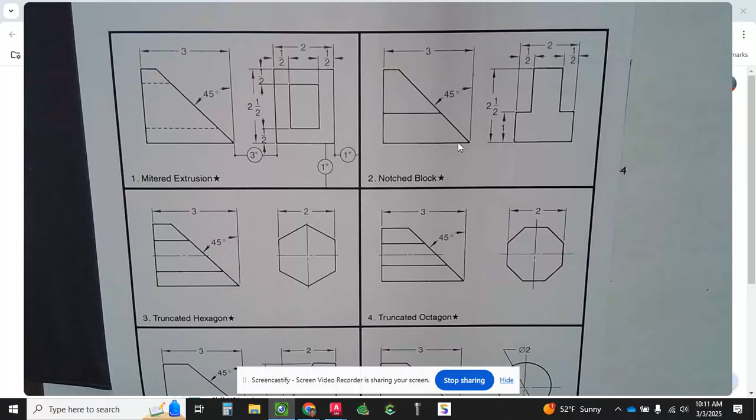This is 3 wide, 2.5 tall, and it's got a 45-degree angle back this way. So I am going to start by drawing me a line. We are not...

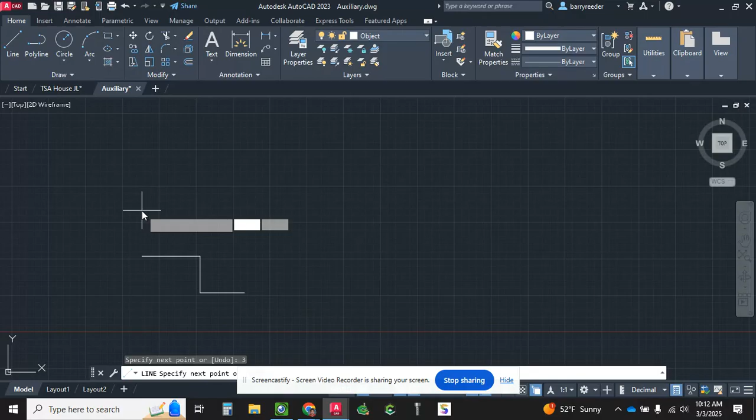I didn't have a flat drawing area, so let me start over. I'm going to go 3 inches this way, go up 2.5, and I'm going to draw me a short line over here at the top.

Then I'm going to draw a line from here in this direction. Straight up would be 90. I'm going to add 45 to that, so let's go 5 at an angle of 135. You can trim or use fillet, either one, to get that like it needs to be.

Okay, our other view is 2 inches wide, 1 tall, 1/2. 2 wide, 1 tall.

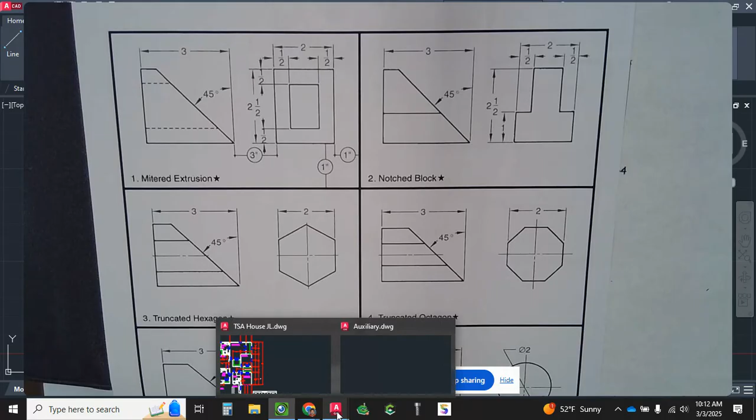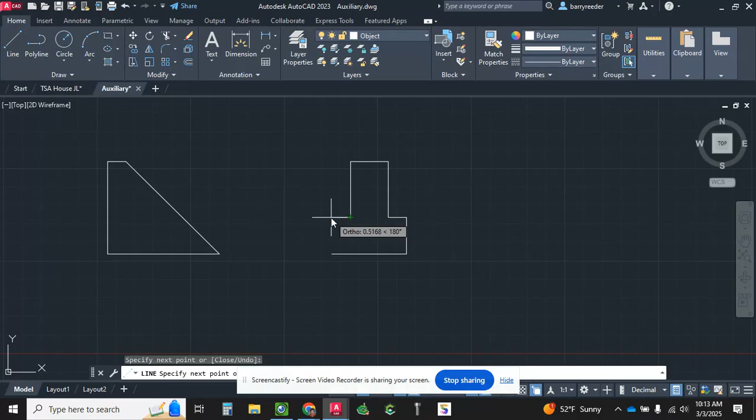So I need to be 3 inches away from that. I'm starting from there, come over 3. I'm going 2 inches wide, go up 1, go over 1/2. Go over 1, 1/2, and back to start.

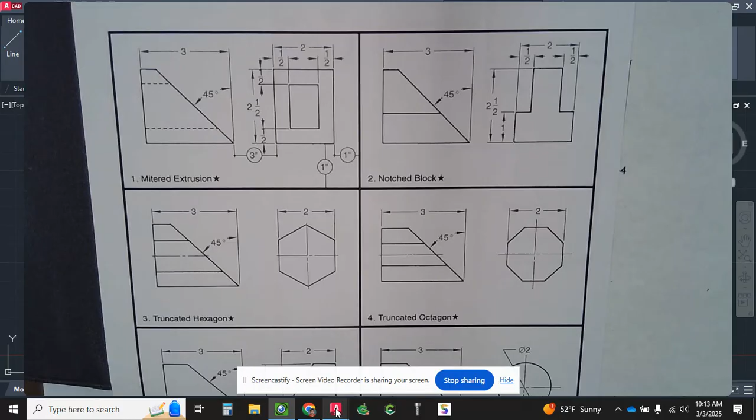So we'll have a line on this that's in line with this here. So let's go back to our drawing. Let's go ahead and put that in. So I need a line here to there.

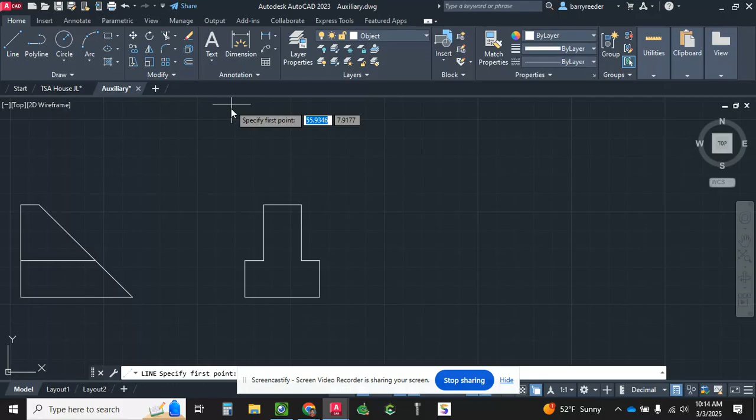Now, drawing the auxiliary view, you need a line that's perpendicular to the slanted surface. The easiest way I've found to do this is I start out here in space and come back to my line here and look for the perpendicular symbol. When I see the perpendicular symbol, click there.

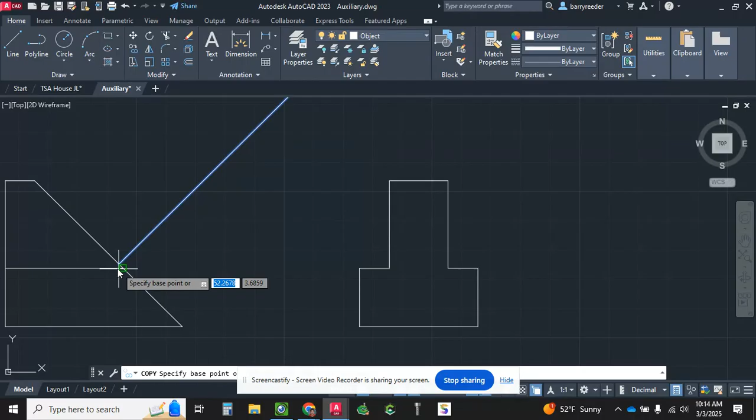Now I'm going to need that line on all of my points on this surface. So I'm going to copy that to there and to there, and then I'm going to move this one.

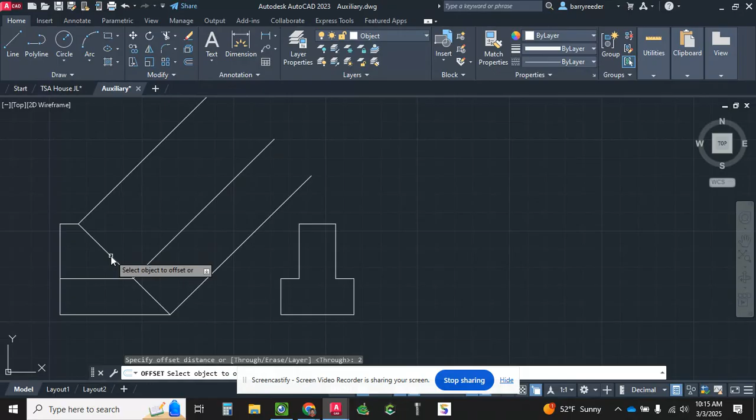All right, our width was on this, and again, this is just my way of doing it. It may not be the perfect way, but my width on this is 2. So that's what I'm going to offset by. I'm going to offset by 2, and offset again by 2, then trim around the rectangle that I just made.

The height of our auxiliary view is based off of this, so we've got everything off of the height. Now our width or depth is based off of this view, so we have 1/2 inch from each side. Again, this may not be the best way, but it's the way I've found easier to do. I'm going to offset by 0.5.

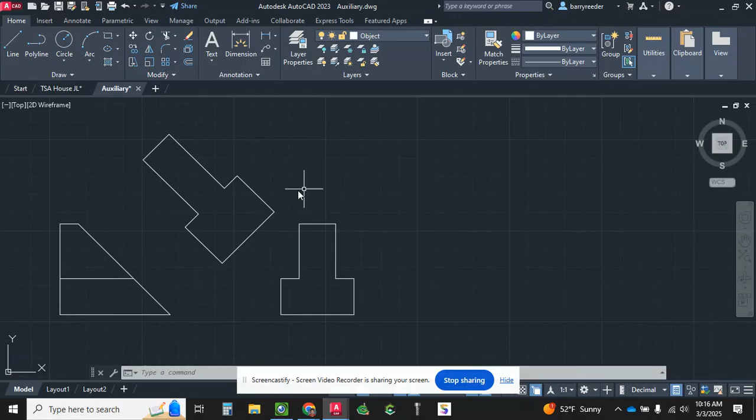Now I have all of my measurements for this view. All I've got to do is trim it up and make it look like what it would need to. Alright, y'all see kind of what I did on that. Let's go to number 4.

And if you're not keeping up, I am putting this on video so you'll be able to access it. This is the truncated octagon. This time I'm going to start with the octagon. It has a measurement of 2 across the flats.

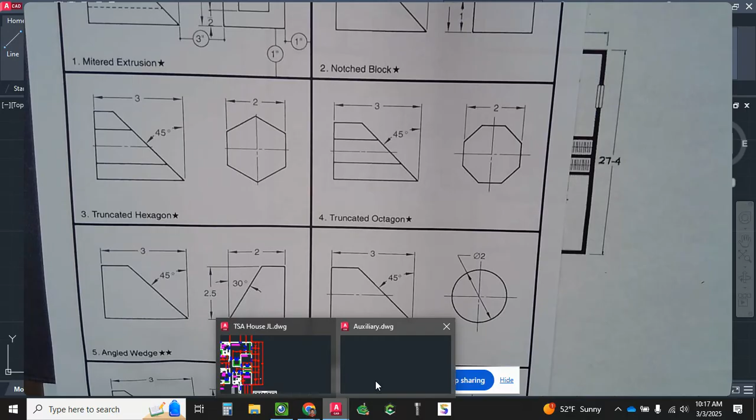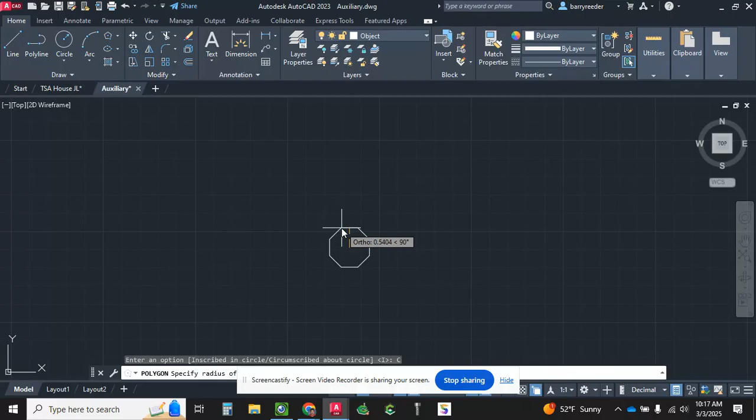So I'm going to go to polygon, 8 sides. I'm going to specify a center. This needs to be inscribed or circumscribed—it would be circumscribed. And it's asking for a radius. The diameter is 2, so the radius would be 1.

Alright, we're going to double check our work. It should be 2 inches from center to center, or midpoint to midpoint. Again, we want to be 3 inches away, so I'm going to do it like this time. I'll go over 3, and that's my starting place for the other one.

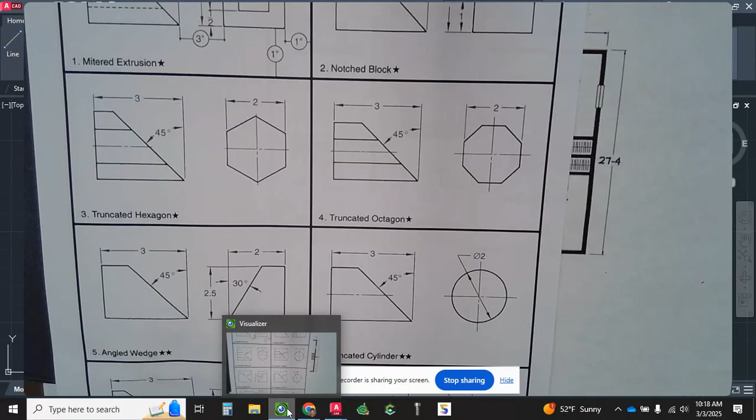Let's go back and look at it. I don't even remember what... oh, it's again 3 inches with a 45 degree on it. So...

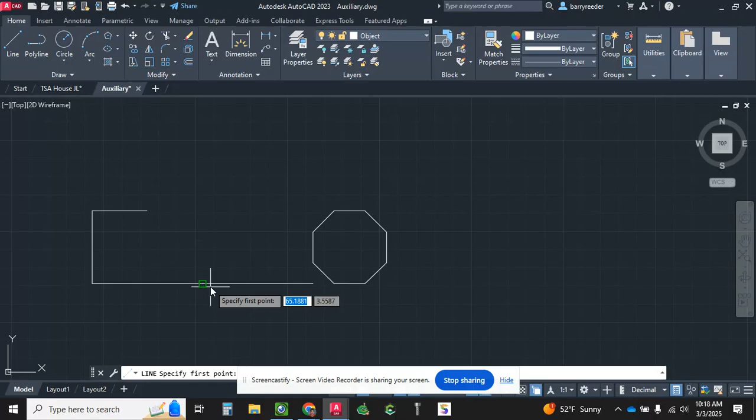Let's go 3 inches from there. We're going to go up 2. We're going to draw a little line over that way, and then start back at our starting point here. We're going to go 5 again at an angle of 135.

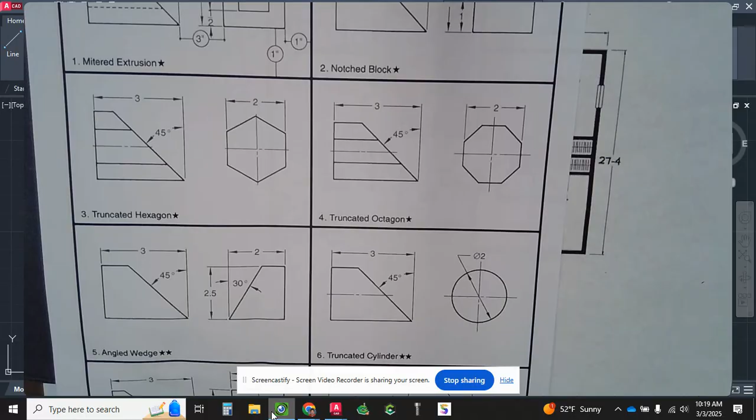See, we also have lines showing where these points go across, and then we have a center line on it also. So let's go to here. Let's draw a line in line with this, and draw a line in line with this one. I'm going to change my layer to center. Go to annotate, center line, and click on those 2 lines. Go back home, and let's go back to our object layer.

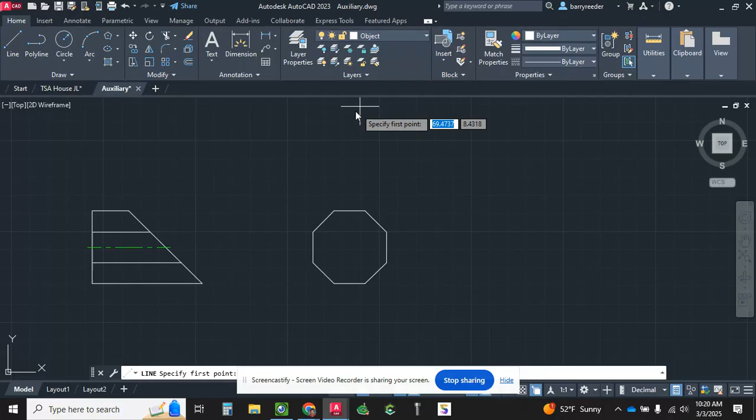Again, I'm going to draw me a line from out here in space, and I'm looking for what symbol? You may have to turn extension off. I saw it—there it is.

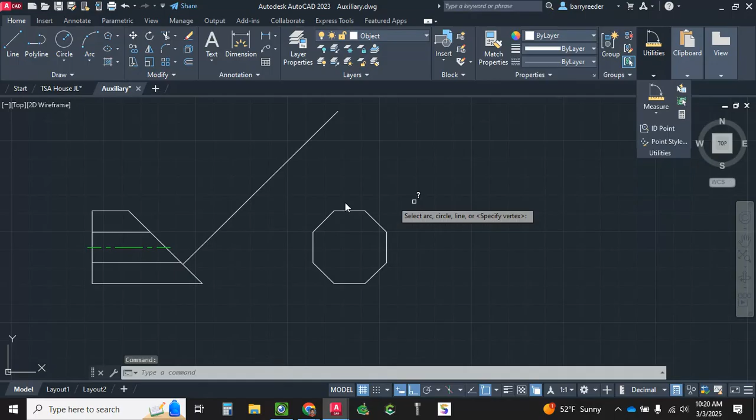There's perpendicular. And again, if we want to check our work on that, we can go back and check our angle—click on this line and this line. It should be a 90 degree, which it is. Again, it's like I missed a little right here too. Let me go ahead and trim this.

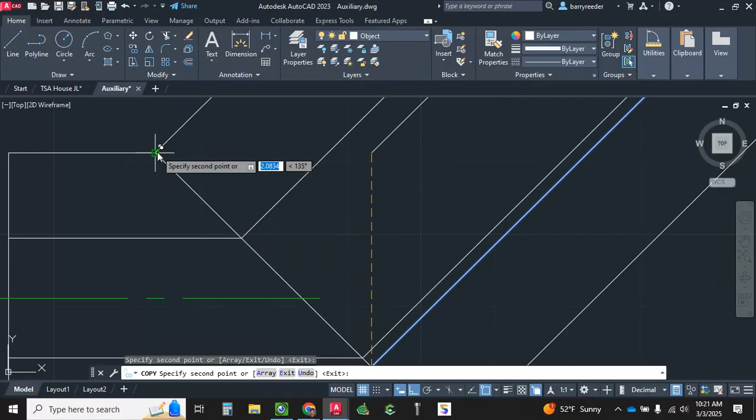I'm going to copy that line to my points. Since I copied them all, I'm going to delete the original. Again, my width is 2, so I'm going to offset by 2, and trim around my box here, or rectangle.

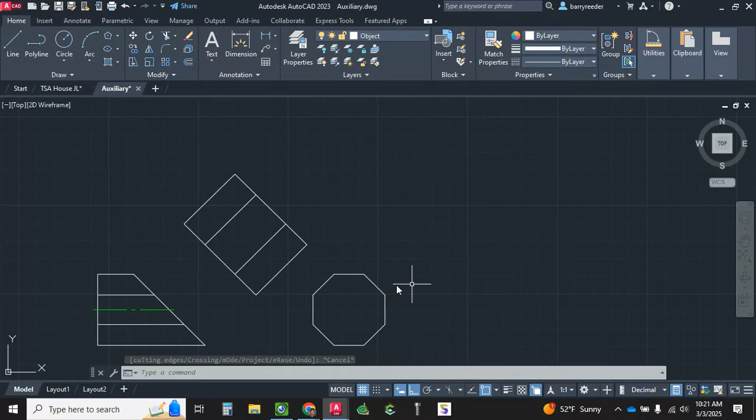We said our height is based off of this, our width is based off of this. So I'm going to have to find out what the distance is across the top, and I'll do that by finding half of my distance, which is 0.4142. We'll draw a line through the center here and offset it by 0.4142.

I'm going to also draw a line across the center this way, and these two I'm going to turn into center lines, and we'll make them the right length in a moment. Now I have my points for my width and my height, so I can go from corner to corner, this corner to this corner, and this corner to this corner.

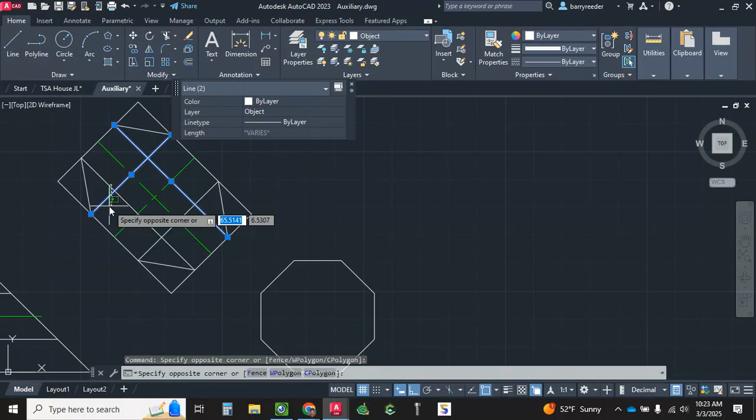I just use these for creation of the object, so I'm deleting those off, and I'm going to trim the corners of this.

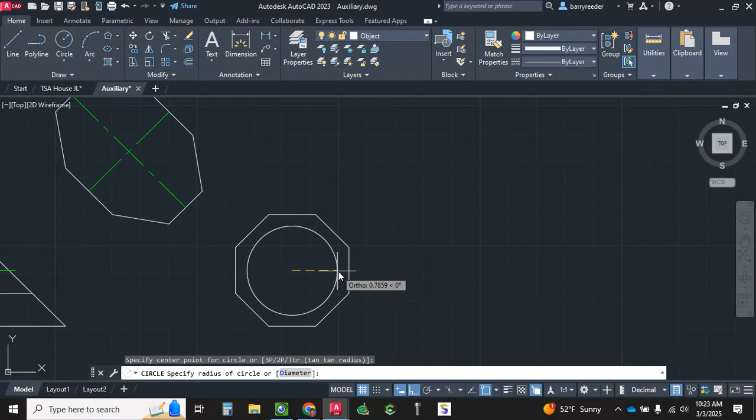I'm going to turn on geometric center so I can find the geometric center of this object, and I'm going to draw a circle inside, use that circle to create my center mark on this. And I'm going to delete my circle that I just used for that. Alright, and on this one, what did we say? Center marks do not stop at our object's lines, they actually go outside the object.

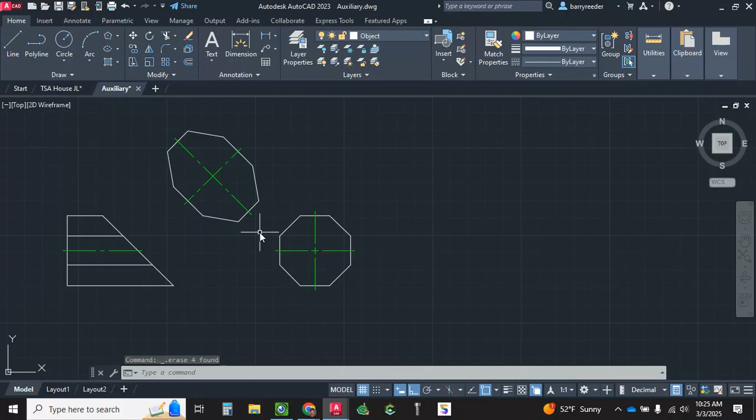So I'm going to offset by 1/8. I probably could just extend those lines by 1/8, but I actually prefer doing it this way. I'm going to use the trim function with the shift button, and I'm going to extend that line, those lines. And there we have the auxiliary view for the truncated octagon.

Alright, now let's go back to our page here. We're going to do number 8, which is a spacer.

On the spacer, it has a semicircle, or a circle. If you were looking at number 8, what would the auxiliary view look like on it? Is it going to be a circle? Or what would an elongated circle look like? An ellipse, that's the word I was looking for. We're going to have an ellipse on this one.

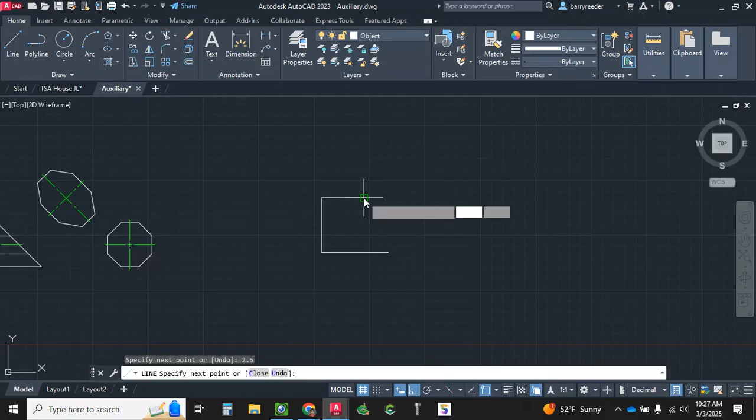So let's start with the front view, which is 3 inches wide, and also 2.5 tall. By doing the math here, 1.5 plus a radius of 1 would be 2.5. So it's 2.5 tall and 3 wide. So we go 3, go up 2.5, and I'm just going to draw a short line there. I think it's also a 45 degree. I'll double check in just a moment, but let's go 5 at an angle of 135.

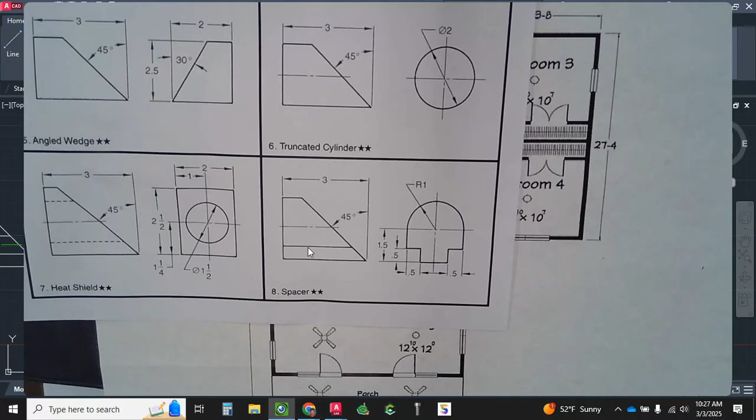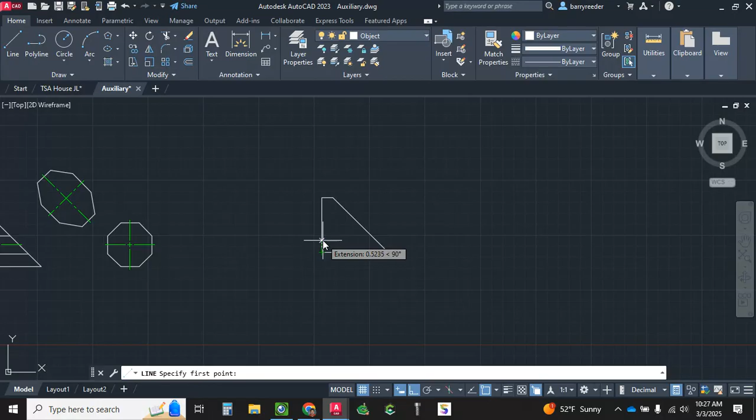Let's just go ahead and put our line in here also, which is a 1/2 inch up, so we can go ahead and put our center line in too. If I come up from that point 1/2 inch and trim that off, that's going to be that view except for the center line. I'm going to change to my center layer, go to annotate, center line, click on this line and that line, and I have my center line made.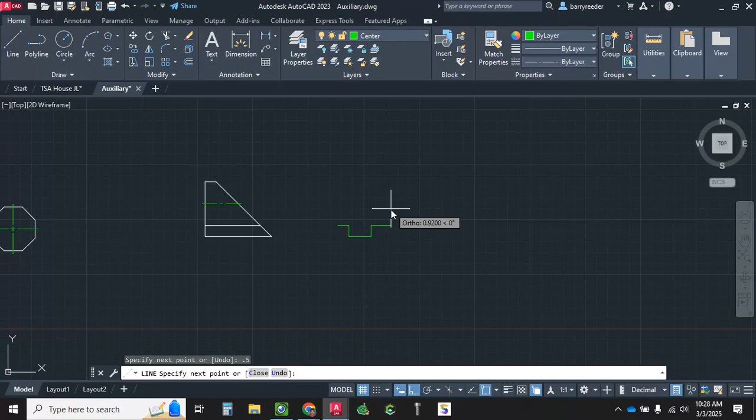Okay, on the other view, it needs to be 3 inches away again, so I'm going to go 3.5 from my starting place. So I'm going over 3.5. I'm going up 0.5, going over 0.5. And should be 1 across the bottom, 0.5 and 0.5.

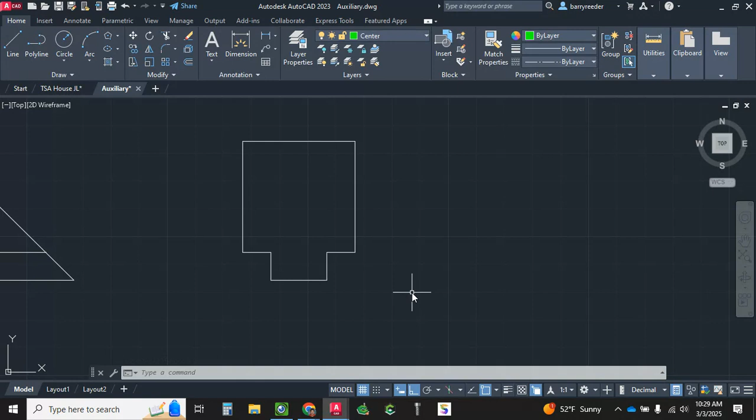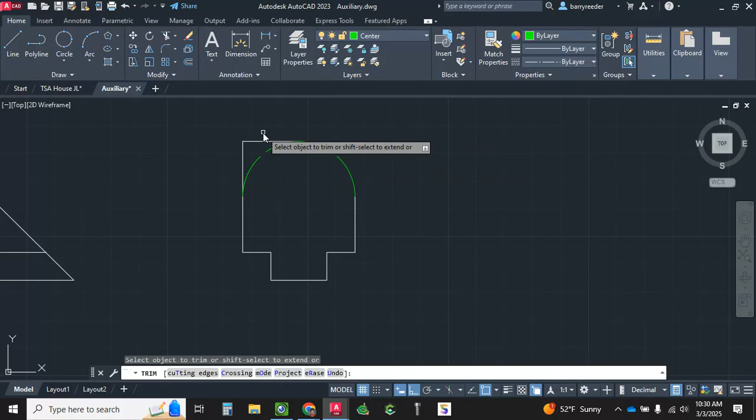Should be able to, I think, use a 3-point circle on this. Let's try it. I'm gonna use a 3-point here, here, and here. Would have been great if I'd been in the right layer. And trim. And turn that into the right layer. Alright, while I'm in the wrong layer, I'm going to go ahead and put my center mark on this.

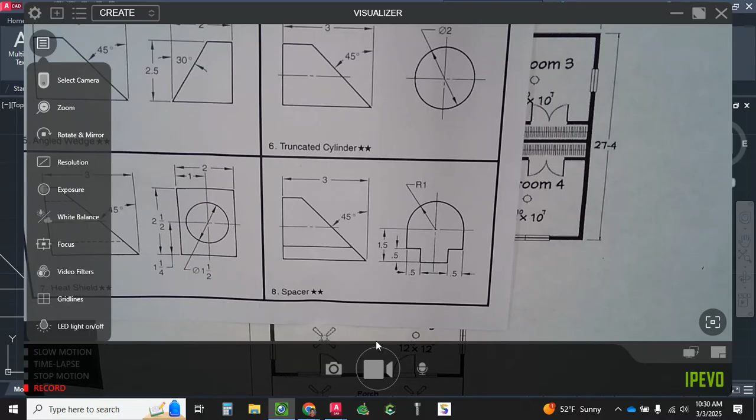Alright, going back to our drawing, we have the front view completed and we have the right side view complete. So let's go back here and start our auxiliary view. Again, I'm going to get in the right layer. Draw a line from out here in space till I see perpendicular.

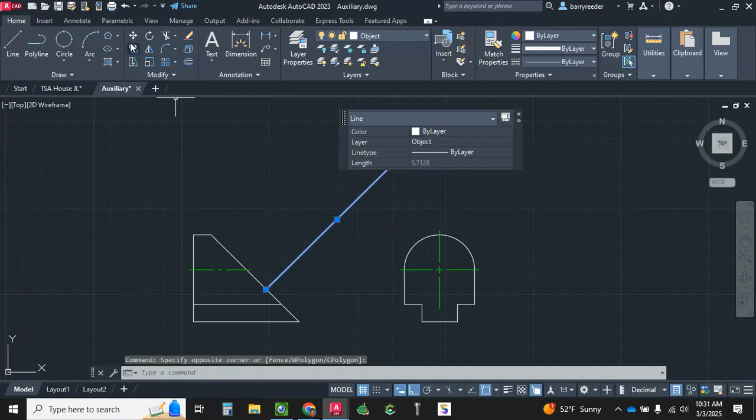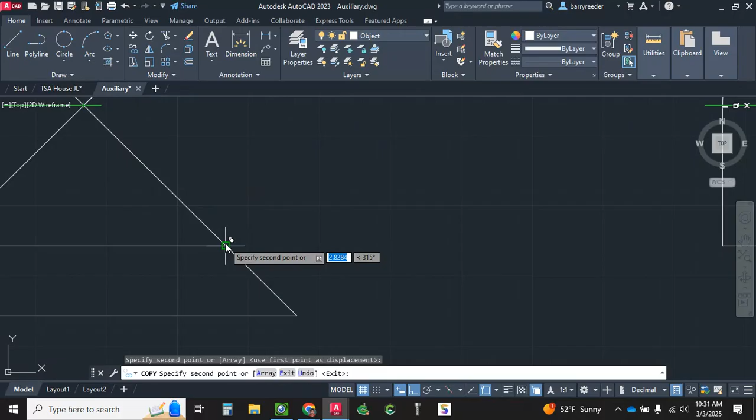Then I'm going to, let's just move it the first time. And then I'm going to copy that. I need intersection turned on, and I don't have it turned on. Okay, again, the width of this object is what? 2, because our radius is 1. So again, I'm going to offset by 2.

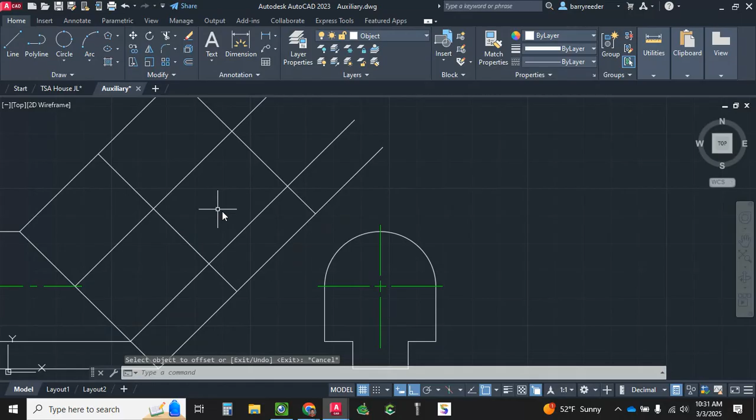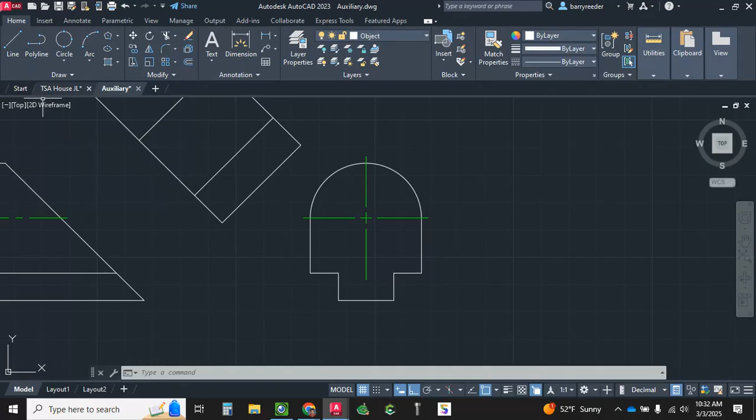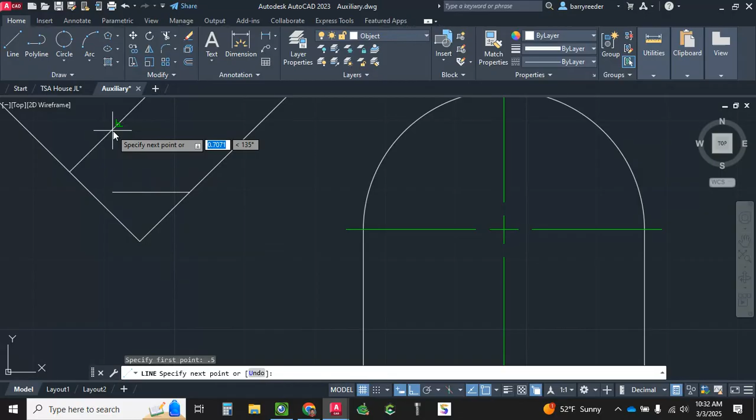I'm going to trim around this. I'm going to turn the reference lines back on and see if this will work. If I'm extending up this object, I can go up 0.5 and go to perpendicular on this. Do the same thing over here at the top. Do an extension on this line, 0.5, and go to perpendicular.

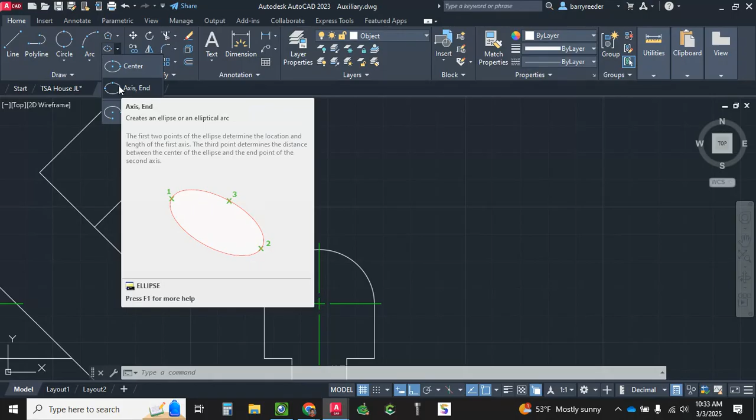Alright, we've got everything except the top of it. Do y'all remember how to do the ellipse? Go to the command ellipse. I can either use the center or the axis end on this. Either one will work. I'm going to do it one time with the center, starting at the midpoint here, touch one of my sides, and then the top. That gives me the ellipse.

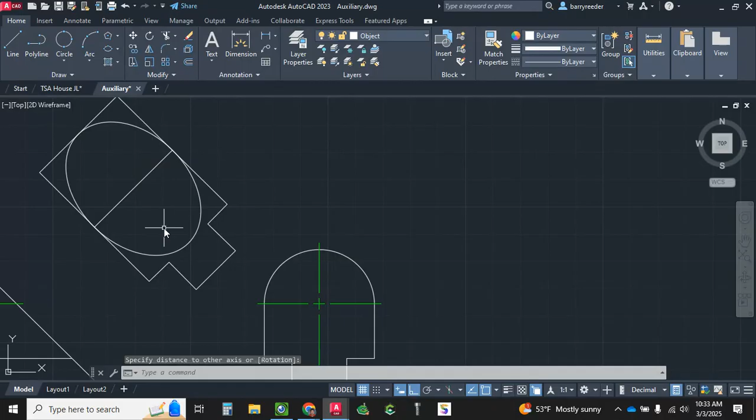Or I can do an axis end. And on the axis end, use this as my axis, and that is my end. I can do the same thing. So let's trim here on the bottom of this.

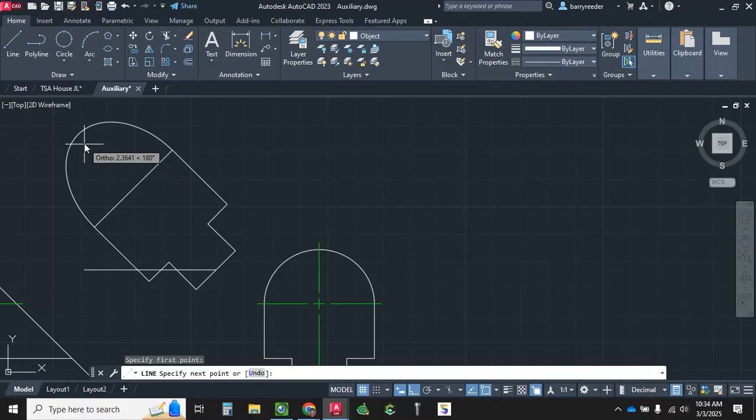Let's draw us a line through the center here. I'm going to turn both of those into center lines. And again, I want these to be longer than the object, so I'm going to use offset. Offset by 0.125. And then I'm going to use extend. And I'm going to delete the lines that I just made.